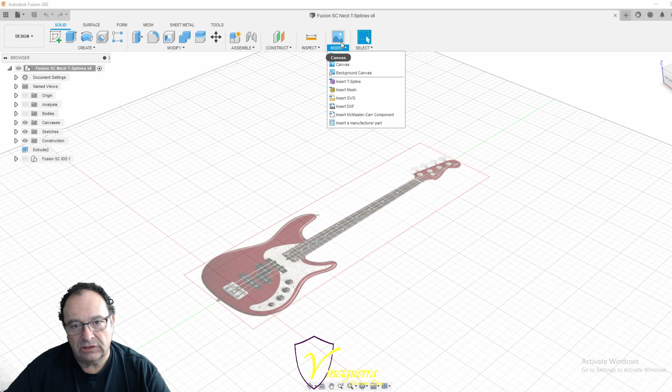If you don't know how to do that, it's under Insert, and you want to insert a canvas. Go out on the web and find the flattest face-on shot you can get. Matter of fact, let's just go on over to here and let's grab something. Let's go Fender P-Bass, and then let's jump right here to images, and we'll just get into the business of it.

So here's the thing, you need a shot like this one that's got the entire instrument, okay? Because you want high contrast, high resolution. Yeah, that's actually pretty good. But you need the entire scale length. Hey, this one's even better from zZounds.

All right, so yeah, then right click and go away. Right click and save the image as. And where'd my deal go? Let's put it up here, let's just pop it in on desktop, that's fine. Now let's put P-Bass.

All right, let's get out of that now and get back over here, and let's go to canvases. Let's get rid of this dude, and let's insert a new canvas. So just so I can show you how to do this, insert from my computer.

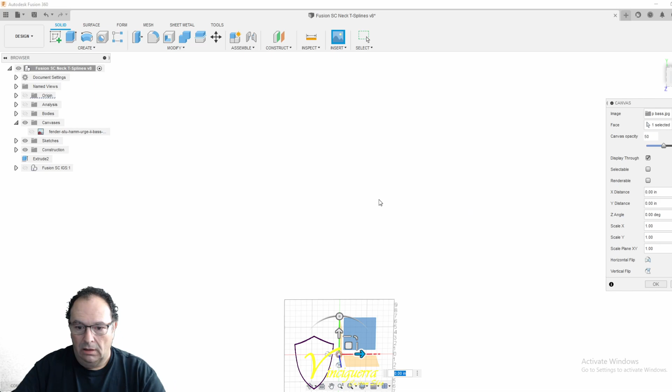We're gonna get right up here. I think desktop was right there, but we'll go to this guy. Get this one. Now when it comes in, you got to tell it what plane you want it on. So this is going to be the face down looking plane. Now that you've selected a plane, now the image is somewhere.

There it is, it's very tiny, very tiny. I'm going to orient this from the top, and at least it is oriented correctly. So I'm going to check my center line real fast. Holy snipies, it's very close.

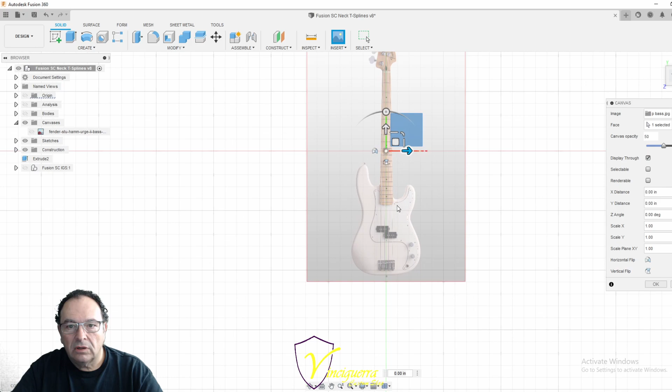And then I'm going to check the nut. Man, it can just nudge over to the left. These guys, the photographer was jamming. So let me scale it up first. Forget that, this is going to be, we'll be all day trying to get that.

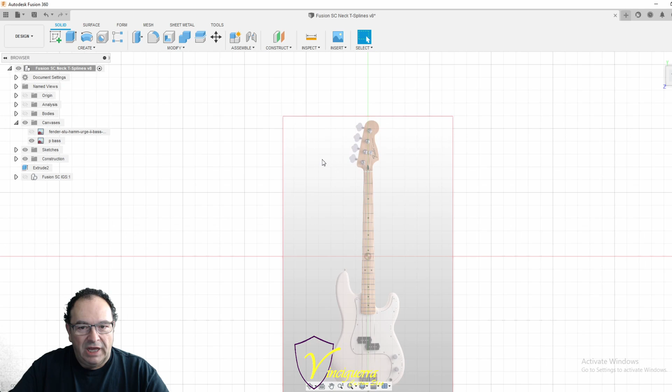And then once we scale it up, while that window was up, what I should have done is there's a little thing here called calibrate. Or just right click on the picture and calibrate. So what it's wanting for you to do at this point is it's wanting for you to give it a known dimension.

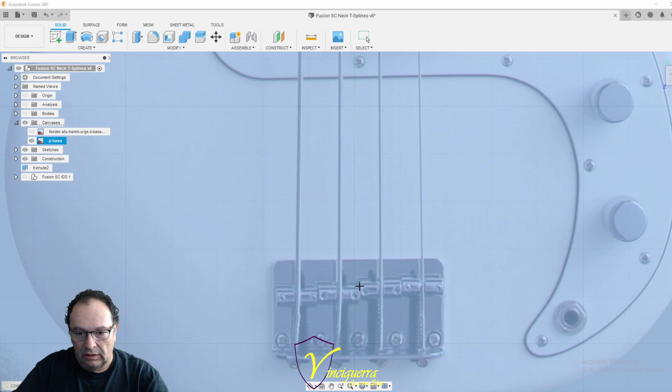So what I want to do is I want to go from this saddle right here, the intonation point, I'm going to bring it over to where I know the center is going to basically be in between those two saddles, and about even with that. And then I'm going to go way up here and I'm going to strike it right in between the nut. Right there. And now you see that's less than 1 inch.

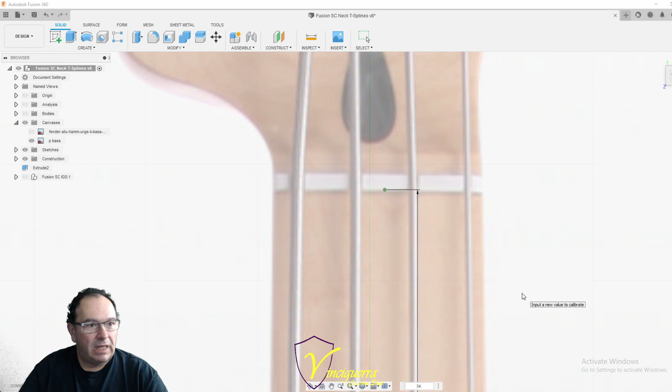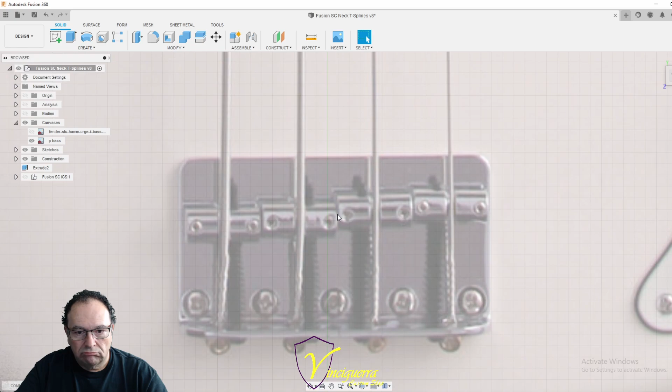Okay, so now let me look. That needs to come over. So whatever that block is, about 1 block. And then up here, man, this really just needs to come about 1 block. I don't know what the measurement is, but let's right click on it again and move it.

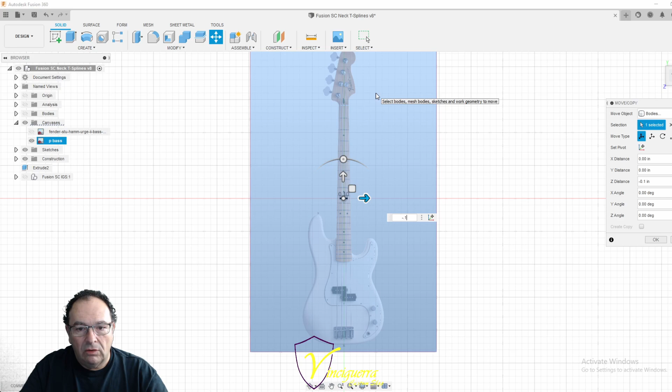And then I'm going to lefty, and I'm going to just go negative 100 thou. I didn't mean to push enter, that's not what you're supposed to do. Oh, that got right on the money. And that's right on the money. See the green line I'm looking at is right in between.

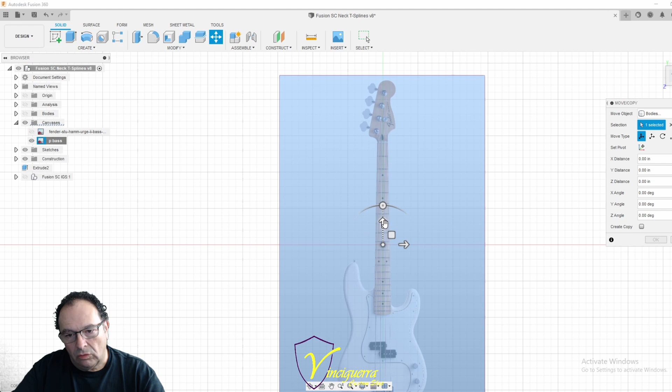That's great, I don't want to spend a bunch of time doing this. That's why I shouldn't have pushed enter, because now I need to go up. And what I want to do is I want to drag it straight up, and I want that intonation point to be right there. So let's go, we don't want a negative, we want a plus.

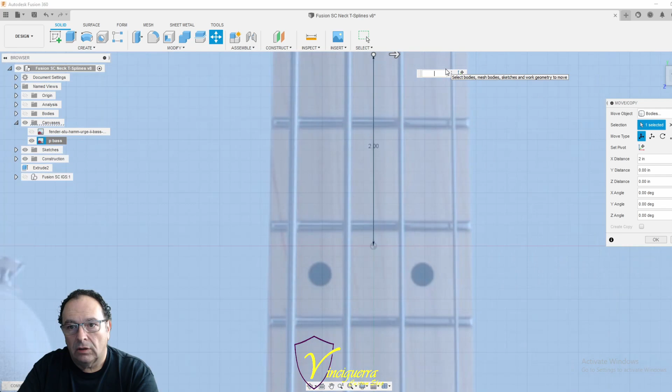You know what, I needed that 20 to stay there, so I've got to go negative, that's going to be 19... let's see, 1980, that's a funny year, 1990, that's real close, let's go 91, 92, and that's it. That's where I'm at.

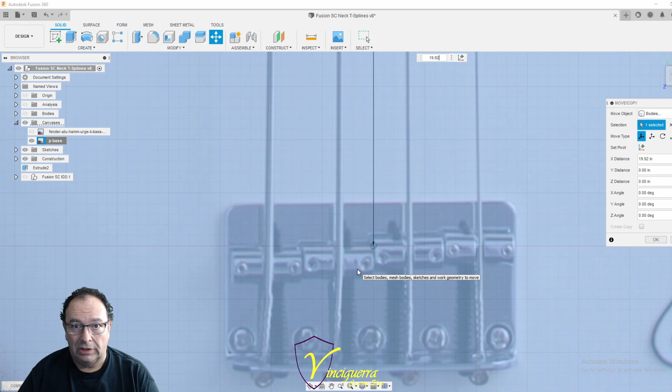So my intonation point, that red line which is origin, is here. I always put my origin and my basses at the scale length, that's the way I do it. That way I know if it's naked, no pickups, nothing. If I'm doing old school pin router templates, my screw, or one of the two screws, goes in that hole, and it's right on the seam of the book match. It works for me. It's home. I always know where home is.

Excuse me, I'm getting dry mouth here. And consequently, that is my origin on my CNC for all of my operations.

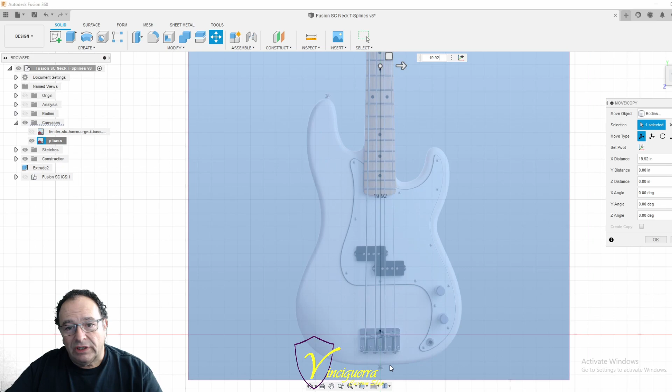Okay, so this body is set. Now we want to trace it and get a copy of a P-bass. But what you can do is find out exactly how far the pickup is from the intonation point. Let's turn on the other one and look.

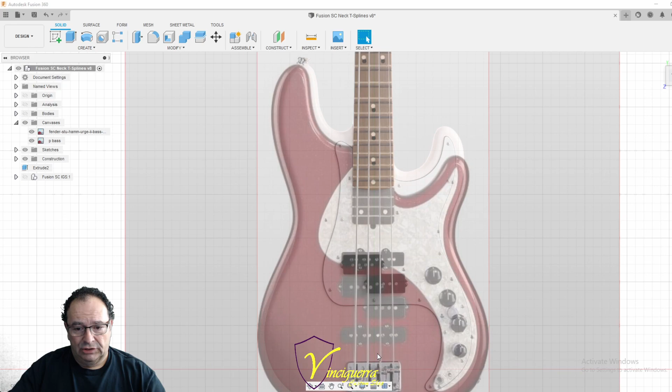So if you just come on in for a little look, this dark one is the P-bass, and this lighter one behind it is the urge. You can see that the P-bass is definitely in a different zip code.

But I listened to a bunch of sound bites of this bass, and I actually dug it. I really did, I think I dug all of the sounds. There wasn't one that was weak, and they had a JP or PJ, then they had all three, they had JJ, and then they had a front JP. And I dug them all. They were cool, man, there was a lot of options.

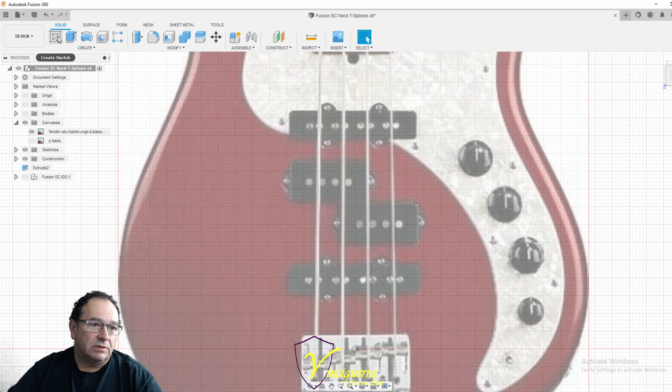Anyway, let's just get back to the original task at hand, which is we want this pickup placement. So basically, what's the simplest way to do this? Create a sketch on the bottom plane, and let's unsnap this.

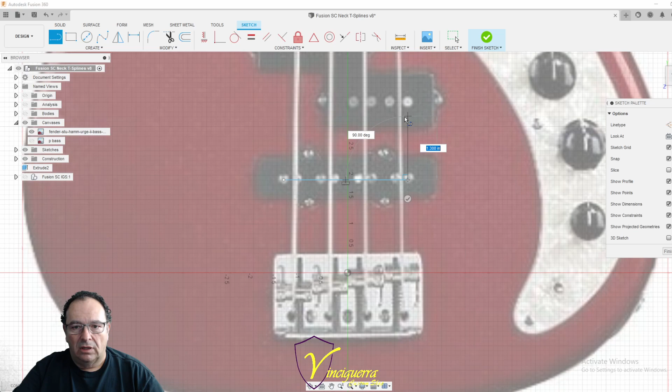Get the snap off, and let's just try to grab it right from the center of that pole. It's still snapping, oh it wants to snap to horizon, that's fine. Just for the sake of ease I'm going to leave that on, and we'll just do this kind of wonky. Boom, okay, that's all we needed.

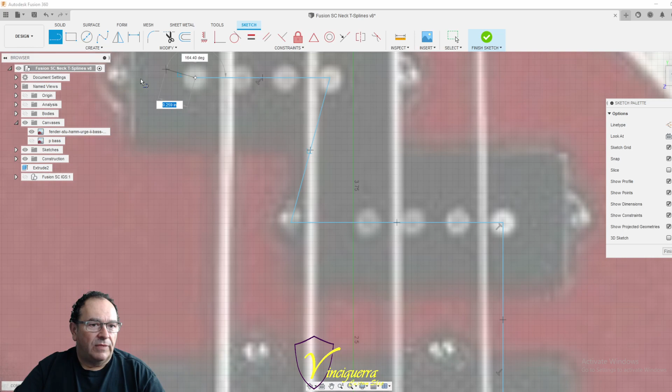So here, hit that, and we want D for dimension. Now let's go from this guy to this guy, pop it here. I think you have to pop from that guy to that guy, and then you have to go from that guy to that guy. Wait, what just happened? Did it do it? Yes, it did.

Okay, so there's our measurements. So to the pole pieces, we've got 1.9, and this one is 3.5, and this one is 4.7. I'd kick off that last digit on all of those, there's no sense in all that. I'm not even that accurate on this right side, and that just shows you the photograph is slightly skewed and you really don't know how, and looking down on this intonation point I could have been back just a butt hair more.

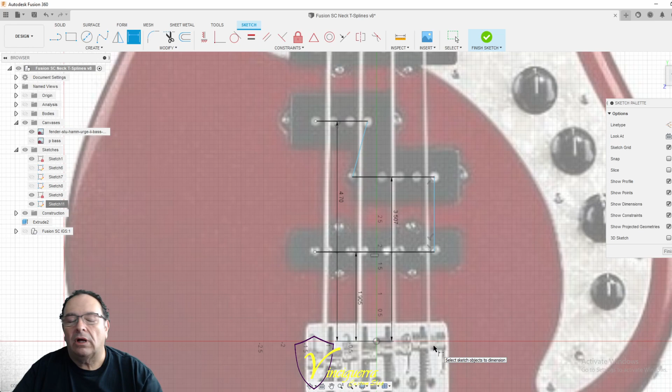So with all that being said, that's where we should be to get that. Oh, I forgot, I left out a whole pickup, dude. So used to two pickups, man, I'm sorry.

I gotta draw the line first. Draw the line, sucker. You know what, yeah, that's all right. Normally I shouldn't have opened a new sketch, but that's all right, should have just added on to the other one. I'm going to keep it on the horizon just like the other one, and let's dimension that one, from there to there. And that guy is 6 1/4.

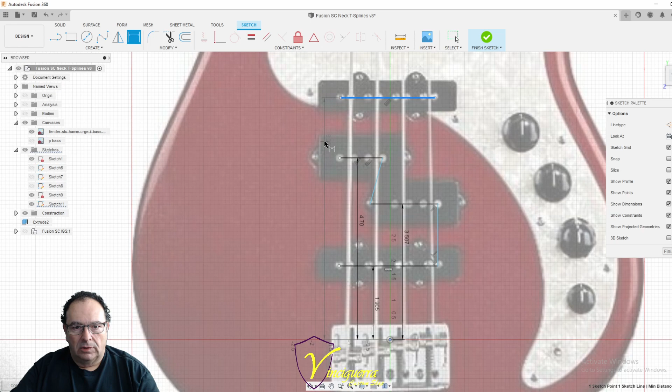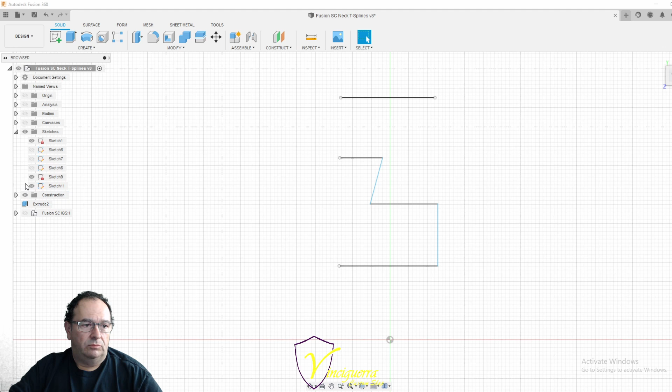I am going to lose this guy, and we'll keep those open for now. Where is my fusion? Here, little fusion, whoop, I saw something, what happened? I think it was down here. Yes, all right, so you can see.

Ooh, that's interesting. Oh, this is a 35-inch instrument too, so now I've got to up-convert. So basically what I'm going to do is, let's just do it real fast.

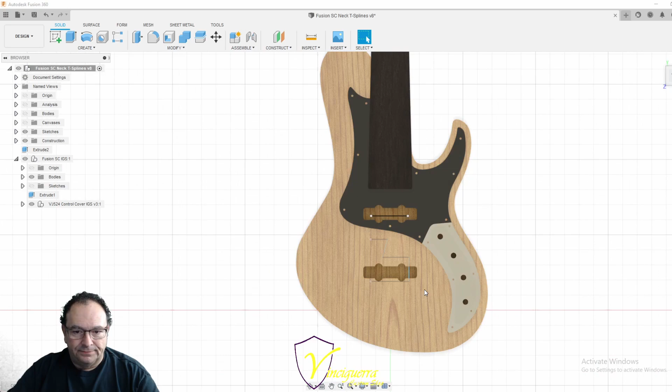Let me get out of this, just turn that off. Okay, should have left that on. Close that. Okay, so basically what we got to do here...

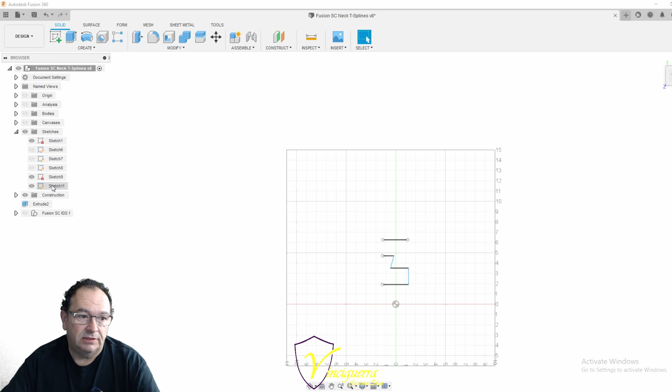If I'm thinking right, get back in our sketches, this guy. So I'm going to go into this and edit the sketch, and I am going to go ahead and put my snaps back on. It's over here, snap to grid. Awesome, get out of the way now.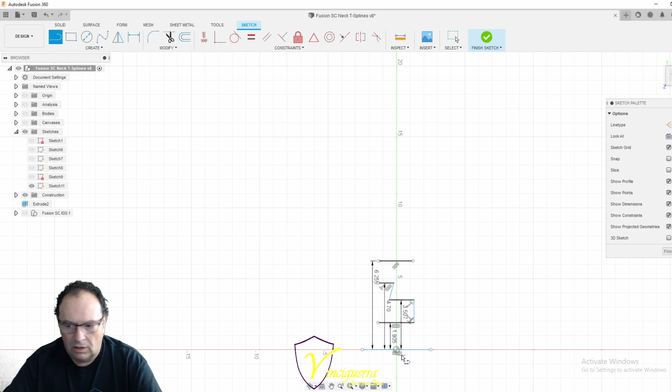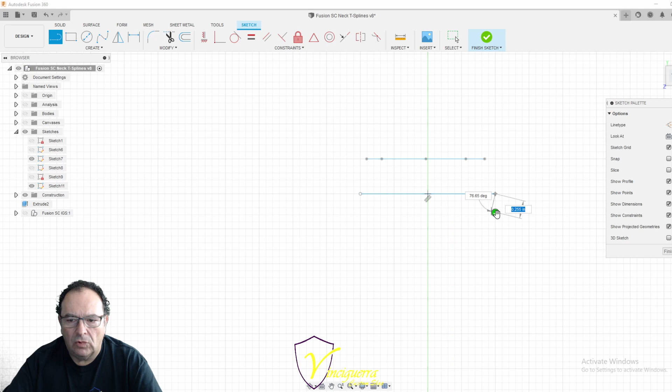And I'm just going to put me a line here, and then I'm going to go up 34 inches. I believe this is going to be it right here, I hope, we'll find out in just a second because we're going to go dimension and take it from here all the way back. I don't know why I'm not using my space mouse. 34 inches. Okay, all right, so that's good.

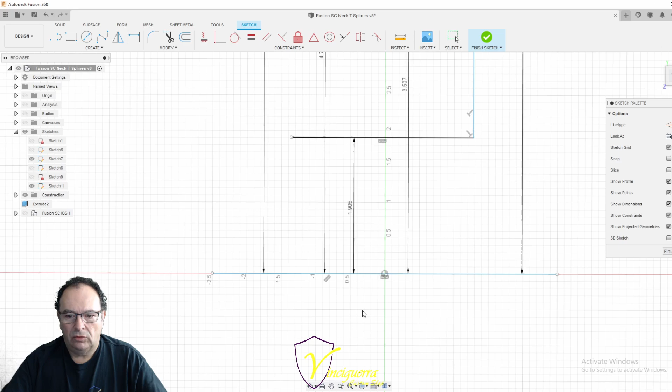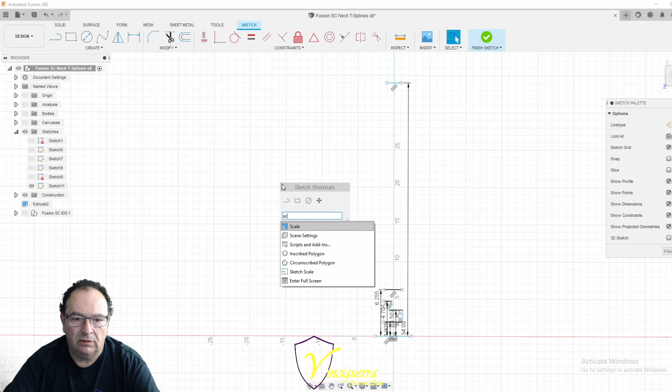So now what we need to do is scale this drawing, or this sketch palette, to 35 inches. Let's see if S gets us there, and scale. Yeah, there we go. All right, so now entities and point. Yep, okay, so let's do it, let's just do entities.

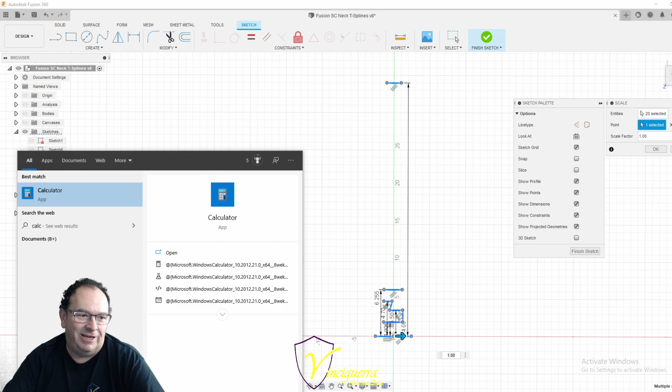And I don't think it's going to let me... Okay, scale factor. So, I feel like such a tard. Sorry. This is how you roll, man. You gotta learn as you go.

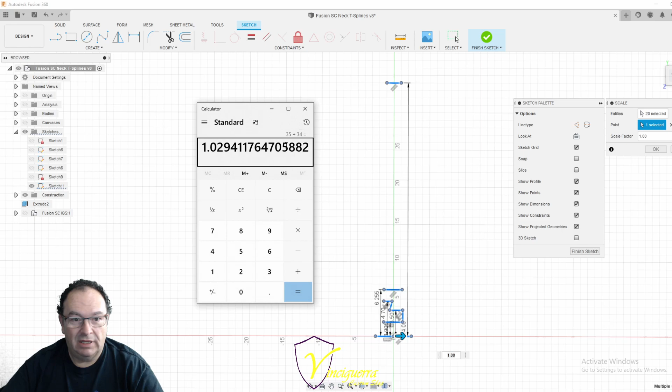I think if you take 35 divided by 34, that comes to 1.0294. So let's take the first, let's do that, shall we? 1.029.

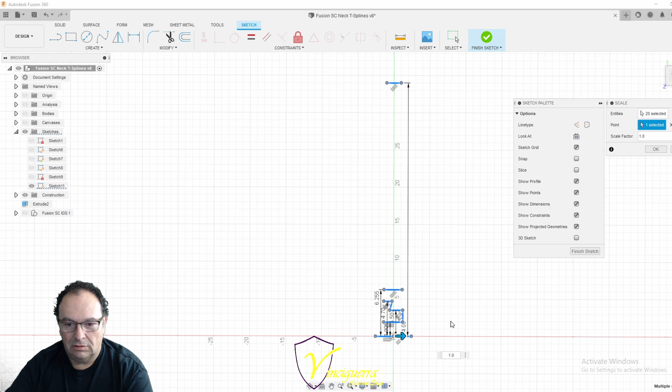And it moved to 35. If you notice, all of these guys here went with it. So let's go back down to 1. See it move, let's just zoom in on that, shall we? All right, 1.029.

See that? So, all right, we're scaled up to 35 inches. I'm keeping it, probably should have saved the original. It doesn't matter, I've got the original canvas. So I could have done that by scaling up the canvas to 35 instead of 34. In hindsight, I should have done it that way. Would have saved a lot of videotape, a lot of talking, and me scratching around trying to figure out what to do.

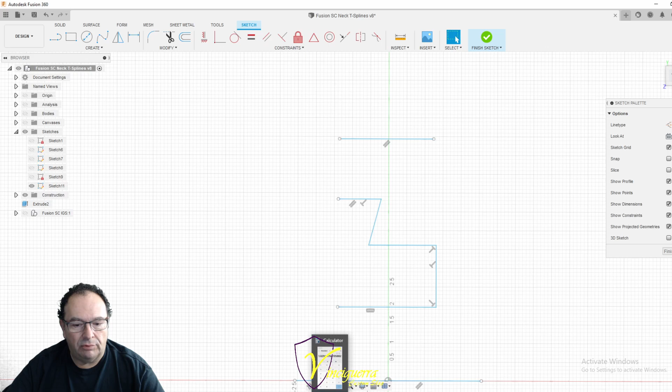That does go to show you how intuitive this program, Fusion, is, man. It's easy to get around in.

So now that I've got that, let's turn back on this guy. So you can see we're right on the money. This is going to be a nice spot for that P, and we're just going to slide the J back. This is going to be an awesome base.

This is Fusion, it's based off of my VJ, which is my Vinciguerra Jazz, or vintage-inspired jazz, which is a 24 fret, the 5-string version, 35-inch scale. 4-string version is 34. This is a 5.

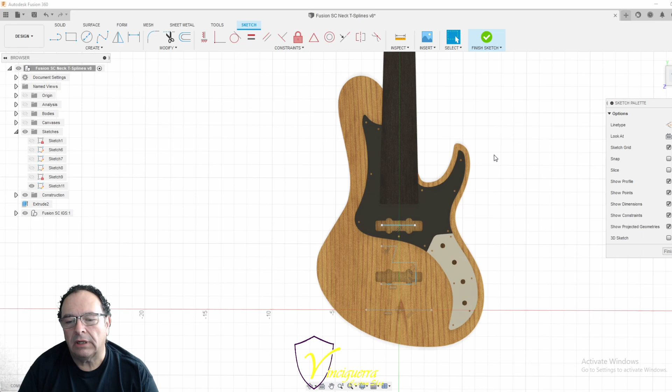So I need to get the appropriate pickup measurements. I can't just trace those that we had. I'm going to go, I think we're going to go Aguilar, possibly. We have some other options we're kicking around, but anyway, I will get the exact dimensions of what we're going to use and put in there, because the 5-string P is a little wonky, obviously.

So, all right, well that's really all I wanted to cover. For what it's worth, I probably lost about half of you guys before I got started good. I guess I should put in the title of this video that this is about Fusion 360 and drawing in CAD and bass guitars and all that happiness.

But those of you that know me and have been in creative conversations with me, I am easily inspired. I get inspired by just walking outside. I was inspired this very morning when I walked into the shop. I was walking up the stairs to the door, and it's been a little cool here in Florida. I'm not going to say cold, because I know most of the country has been decimated by these crazy cold snaps. We had a cold snap that it never even really froze. So, but the thing that's weird in Florida is when you get a 40+ degree morning, it could easily get in the 70s. Yesterday it was weird. It was 46 in the morning, and I think it was 84 in the afternoon. Crazy, it's weird. The concrete here will start to sweat. Your floor will start to get wet because of the ground temperature and the air temperature being so radically contrasted.